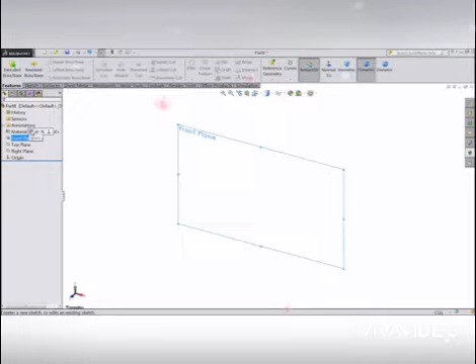Now we will make the first part of knuckle joint eye end. Select front plane, sketch, select circle and draw two circles with origin point.

Keep the diameter 100 mm, 100 centimeter and 50 centimeter. Now here we selected the dimension centimeter.

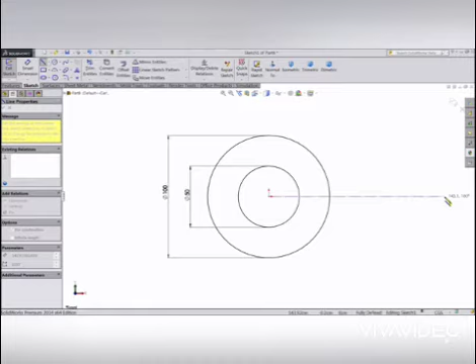Select center line and draw one horizontal center line. Make sure it is horizontal. Select corner rectangle, select the circle.

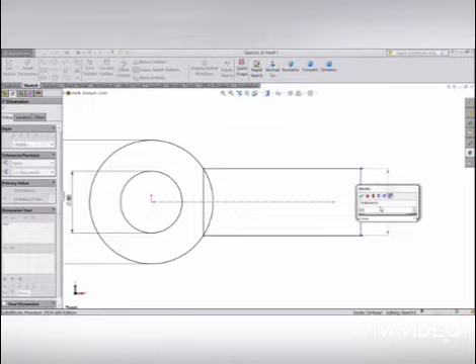Now select these three lines and make relation symmetric. Now select this width, height 60 mm and the distance from this end 140 centimeter.

Now choose trim entities, delete inside lines. Select sketch fillet and keep this one 50 centi. Select this line and this circle the same as opposite direction.

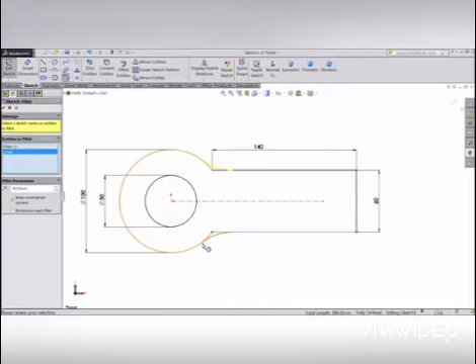Now let's extrude it. Select extruded boss and extrude up to 60 centimeter.

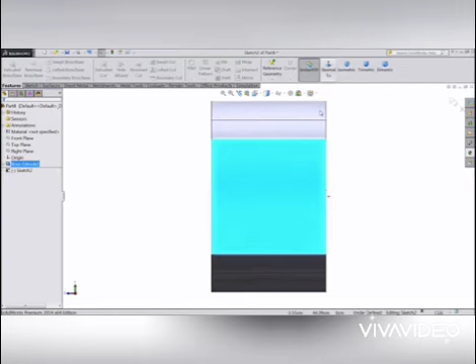Now select this face, sketch, normal. Here draw one circle and keep the diameter.

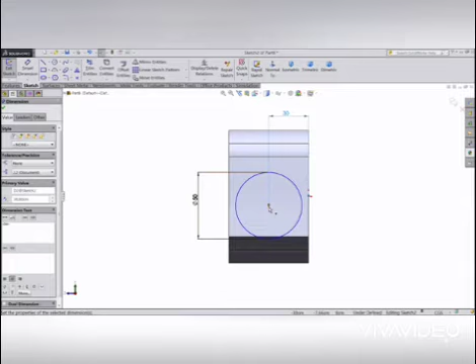50 centi and the distance from origin point keep 30 centimeter. Okay, and select the midpoint of circle and origin point and make a relation horizontal.

Select a line and we want to make some relation here. Draw one triangle and assign the dimension for triangle 18.06 centi.

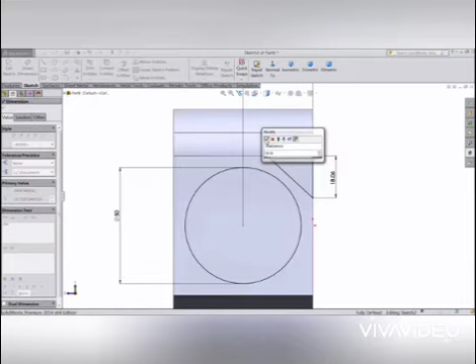Select OK. Now choose circular pattern. Select this as a center point and select these three triangles.

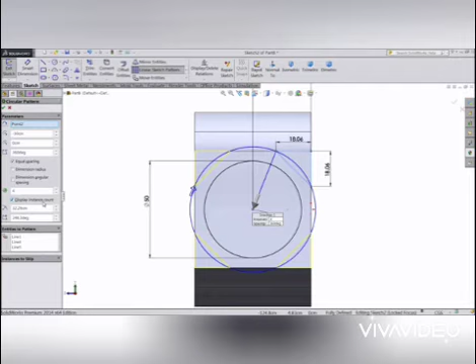Center point delete and select this as a center point. We want 4 number of patterns. Select OK. Now see here selected.

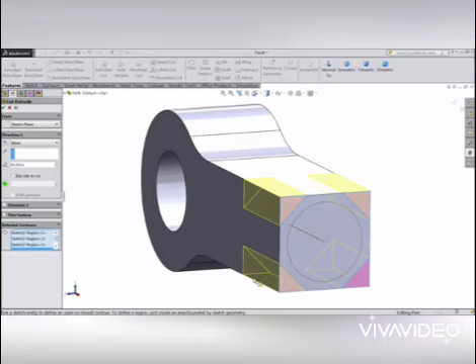Select this corner pattern only and cut up to 60 centi inside.

Now again choose this sketch and select extruded cut and here select only center point. Oh sorry, we want to extrude this time.

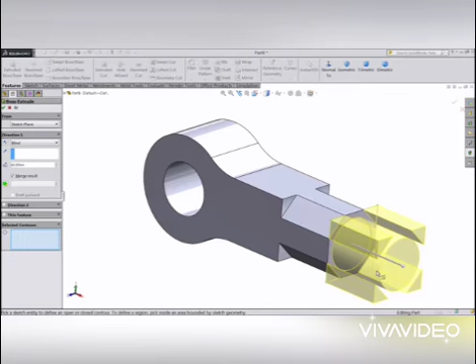This time select only circle and extrude up to 120.5 centi.

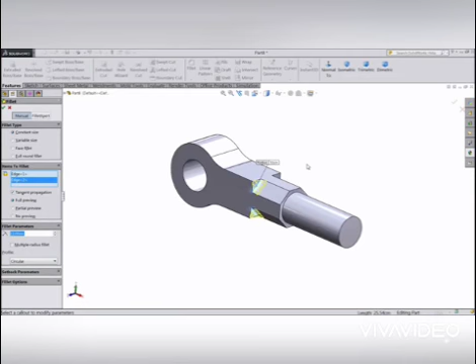Choose fillet, keep 12 centi and select this all 4 corners. Now our first part eye end ready.

Select metal and give brush finish to whole body.